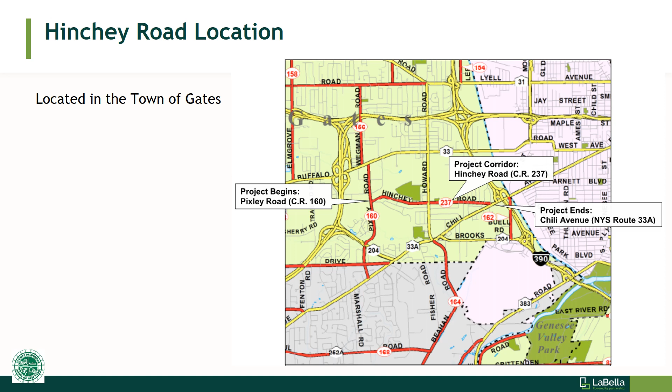Hinchey Road is located in the town of Gates and is situated between Pixley Road to the west and Chili Avenue to the east. Hinchey Road is owned and maintained by Monroe County, while Howard Road and Chili Avenue, which is New York State Route 33A, belong to New York State Department of Transportation. The project area includes all of Hinchey Road and the intersecting streets.

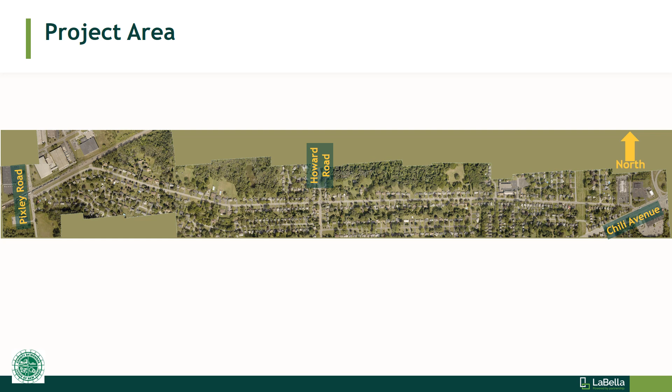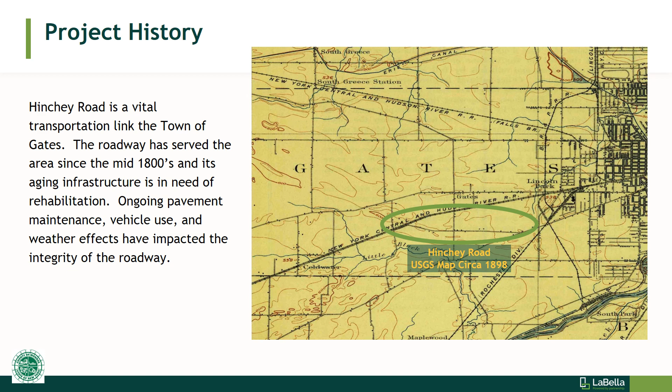The corridor serves residents along Hinchey Road and surrounding neighborhoods. In addition, it is used as a through route between the southwest side of the city of Rochester and the Gates-Chili area. Hinchey Road has been a part of the town of Gates for over 100 years. The roadway structure has been maintained through various construction, rehabilitation, and maintenance operations. However, ongoing vehicle use, weather effects, and sheer age of the roadway have created a need for action.

The existing roadway is comprised of two 11-foot wide travel lanes. In addition, there is a variable width shoulder along both edges that ranges in width from 2 to 5 feet. The existing pavement cross slopes are variable as well. There are no formal pedestrian accommodations along Hinchey Road, and bicyclists share the roadway with vehicles.

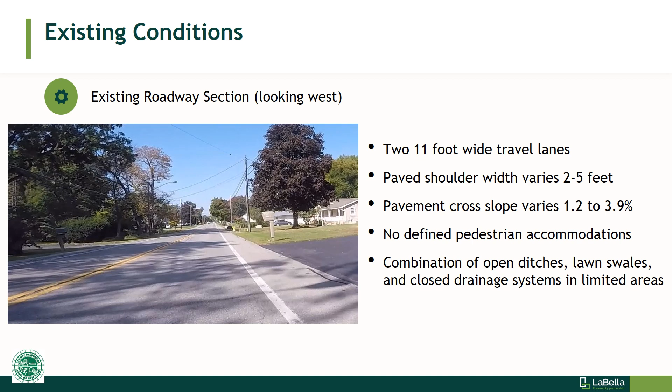Stormwater drainage is accommodated primarily through open sheet flow from the roadway to neighboring lawn areas. Some ditches and lawn swales exist. There are some portions of closed drainage systems and dry wells within the project area. The posted speed limit throughout the project area is 35 miles per hour. Measurements of vehicular speeds obtained in 2019 show that 85% of drivers travel 34 miles per hour or less while traveling the roadway.

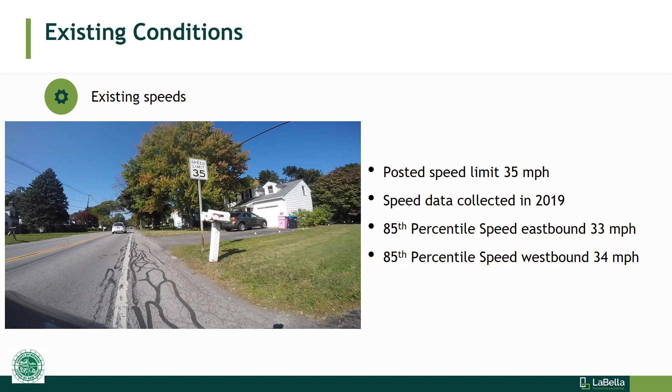Monroe County has implemented various maintenance operations since the roadway's original construction. The latest treatments included a mill and resurfacing of the top 1.5 inches within the western portion of the project area from Pixley Road to Howard Road, and a surfacing application known as micropaving for the eastern portion from Howard Road to Chili Avenue. Both of these maintenance applications took place in 2009. In addition, the New York State Department of Transportation performed an intersection rehabilitation project at Howard Road in 2011.

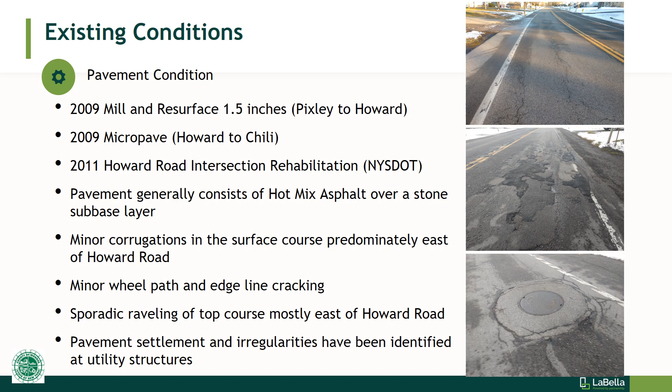The existing pavement has been found to display minor surface distress in the form of corrugations, wheelpath rutting, and longitudinal cracking predominantly found along the edge lines. There are areas of asphalt raveling found in the eastern portion of Hinchey Road. Lastly, there is settlement and cracking of the roadway adjacent to utility structures like manholes and valves.

The roadway serves numerous passenger cars, trucks, and buses. Hinchey Road carries an average of 6,230 vehicles per day as recorded in 2019. Future traffic volumes were established by applying a 2.5% growth rate to existing vehicle trips. Existing and future levels of service were evaluated and found to be acceptable for the project area.

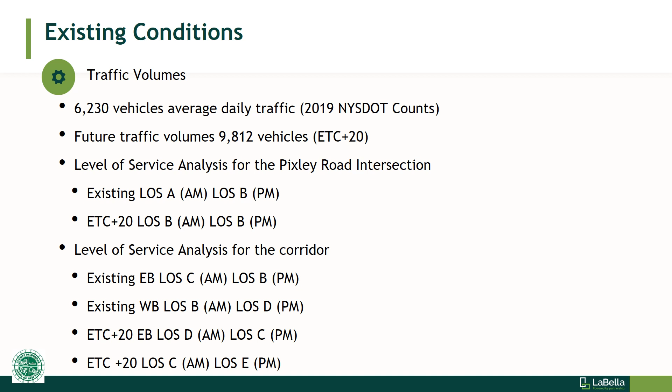We reviewed recorded accident information for the 3-year period from June 1st, 2016 to May 31st, 2019. The data included 60 crashes within the project area, of which 18 were non-reportable, meaning minor incidents. 30 were classified as property damage-only incidents, and 12 included an injury of some form. One accident included a bicyclist.

This incident occurred at the Howard Road intersection and has been attributed to the cyclist traveling through the intersection against the red light. Also, there have been no recorded fatalities during the evaluation time period. While analyzing the data, it was found that there is no discernible accident pattern or collision clusters that would indicate the need for corrective design elements.

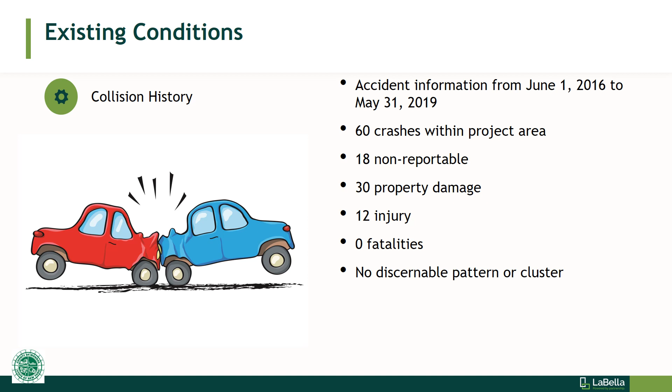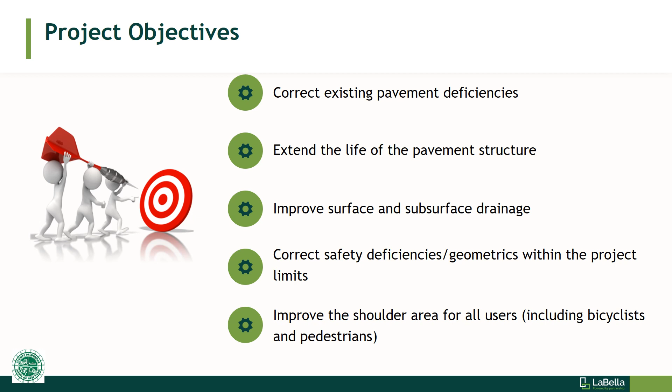Given the evaluation of the project area, Monroe County is progressing the project to rehabilitate the roadway. The objectives of the project are to correct existing pavement deficiencies, extend the life of the pavement structure to ensure the roadway provides safe, efficient transportation options for the users, improve both surface and subsurface drainage, correct or improve safety within the corridor, and then improve the shoulder area for all roadway users to include bicyclists and pedestrians.

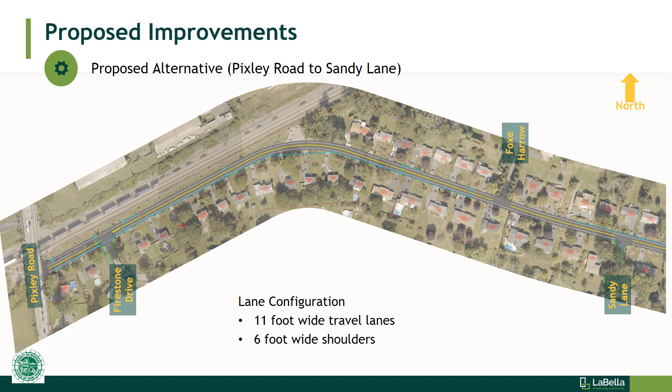The next few slides depict the proposed improvements, which consist of widening the roadway and providing 11-foot wide travel lanes, one in each direction, along with 6-foot wide shoulders and curbing along all of Hinchey Road. As we progress through the project from west to east, the same roadway section will be provided, one travel lane in each direction and widened shoulder. The existing lane configuration will be maintained at Howard Road.

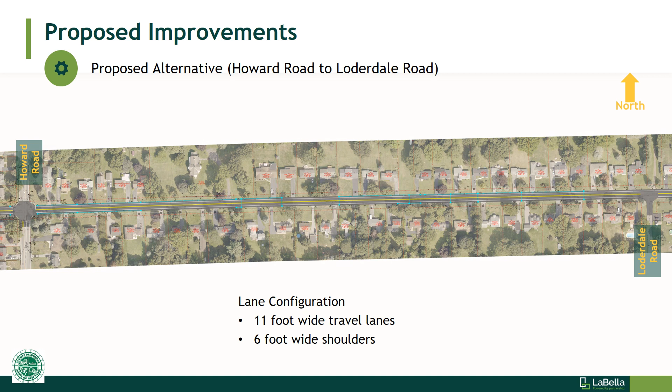Continuing from Howard Road east is the same roadway section. Please note that driveway connections will be reestablished for all neighboring properties throughout the project area. This last slide shows the project approaching Chili Avenue in the east. Again, the same 11-foot wide travel lane and 6-foot wide shoulder along with curbs will be implemented and connected to all side streets as well.

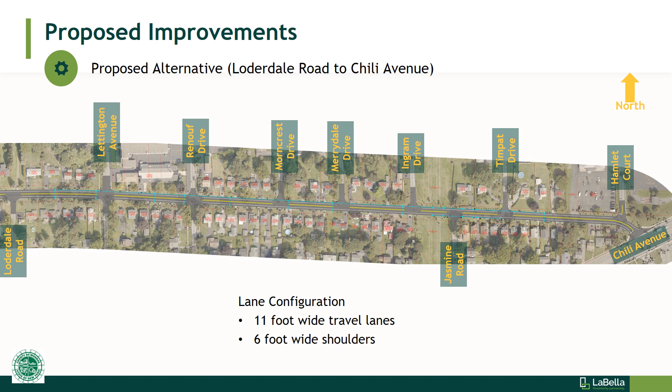The proposed improvements are depicted in this cross-sectional view. Please note that the alternative will provide new full-depth shoulder construction to accommodate the wider shoulder. Granite curbing will be installed to define the edge of roadway and direct stormwater to a new closed drainage system. Lawn areas will be graded and blended into the new roadside.

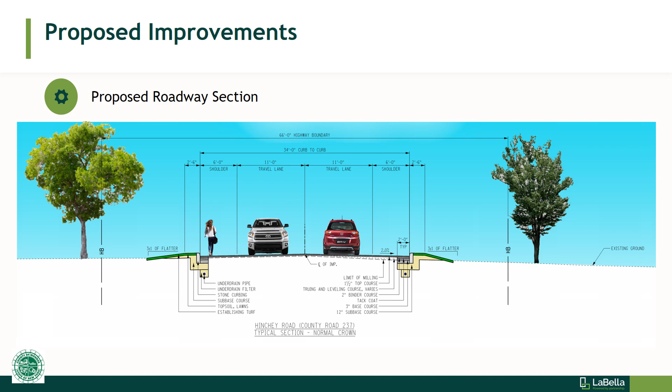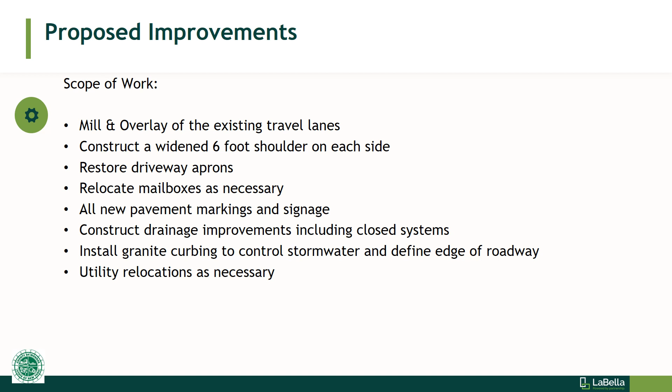The planned improvements include a mill and resurfacing of the existing roadway surface to repair the surface distresses and retain the useful roadway structure. New 6-foot wide shoulders will be achieved through a full depth construction to widen the roadway. New closed drainage systems will be constructed throughout to convey stormwater. As mentioned previously, new curbing will be installed. There will be some utility relocations, like utility pole relocations and waterline work included as necessary to allow for the roadway widening.

Preliminary design and project study began in 2019, and public documents have been made available online for review and comment. After comments have been received and addressed, Monroe County will begin the development of detailed plans and specifications through the summer of 2021. The project is anticipated to be advertised for contractor bidding during the fall of 2021. Construction is planned to start in May of 2022, with construction being complete in November of 2022.

Upcoming tasks include meeting with neighboring residents to discuss project details, if requested. We will also review and address comments received subsequent to this presentation. The project team will complete final detailed design and begin any necessary property coordination. The property coordination is anticipated to be restricted to driveway and lawn grading for the reestablishment of property frontages.